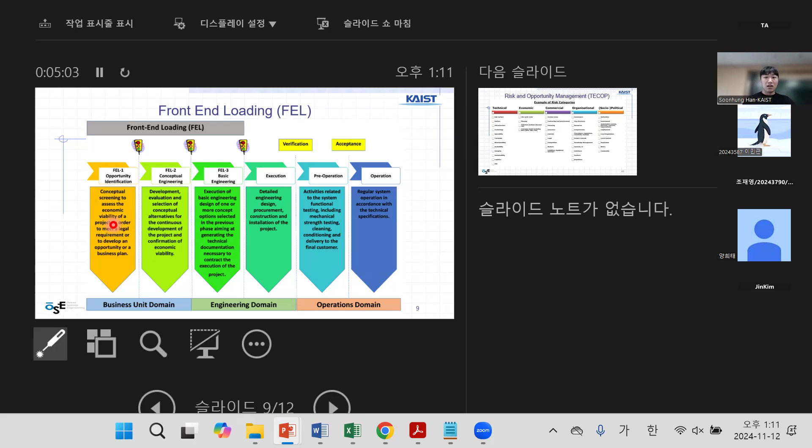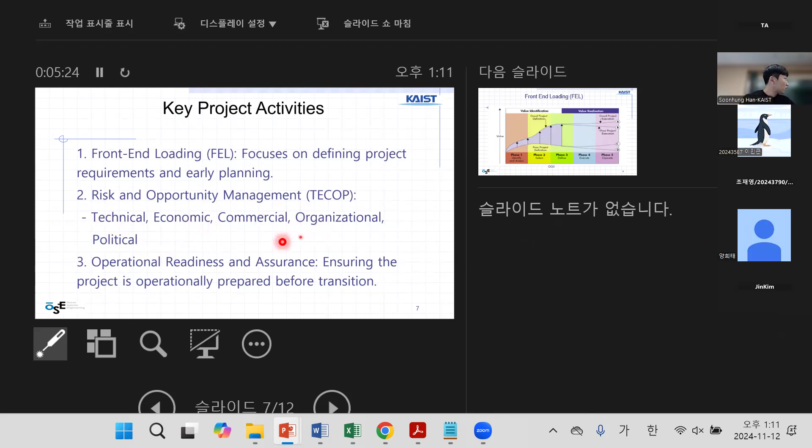And then I told you about risk and opportunity management, like this. TECOP is technical, economic and commercial, organizational, and political. So that is related to these issues.

So we have to identify some issues before we start the project. In the Ocean Plant project, the...

I think the technical design is more important than economic or commercial, because, as you saw in the video, the complicated design is in Ocean Plant.

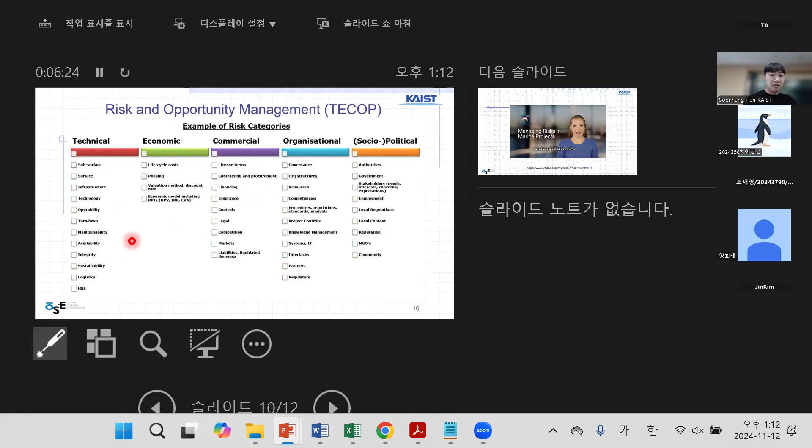So I will show you how to manage this effect, in the video.

Managing risks in marine projects is crucial for success. One key risk is environmental impact. For instance, during a dredging operation, we must assess sediment displacement and its effects on local ecosystems. Implementing a robust environmental management plan can mitigate these risks effectively.

Another significant risk is equipment failure. In a recent offshore wind farm project, we faced unexpected downtime due to a crane malfunction. By conducting thorough pre-project inspections and regular maintenance, we can minimize such disruptions.

Weather conditions also pose a challenge. During a marine construction project, we had to halt operations due to severe storms. Developing a flexible project schedule that accounts for weather variability can help us navigate these uncertainties.

Lastly, stakeholder engagement is vital. In one project, miscommunication with local fishing communities led to conflicts. By fostering transparent communication and involving stakeholders early, we can build trust and reduce resistance. Incorporating these strategies not only enhances project resilience, but also promotes sustainable practices in marine project management.

Right? Not a simple subject. This is the second part of it. So here, you can see I already explained about EPC.

What is EPC? Say again, what is EPC? Short name? EPC? Engineering procurement. Engineering, procurement, construction. So engineering means, in general, it's a design, more than design.

So EPC, the FEED is before EPC. So we already saw that EPC contract. Last week we heard about EPC contract.

Who will be the contract body? In the old days, 10 or 20 years ago, engineering companies such as Technip were the main contractor. But as the project gets bigger, like $1 billion, they gave up being the main contractor.

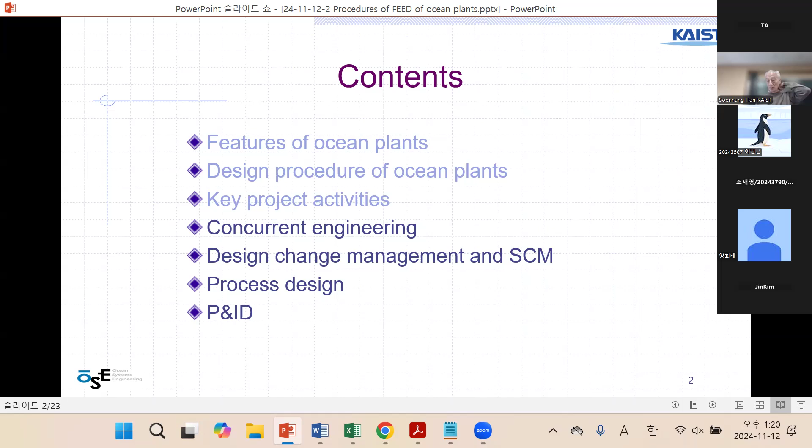You see more of this, and the motivation, because the ocean plant is complex, interdependent parts of millions of parts. Millions of them are interdependent, and also the whole system is independent.

You can say it's a closed system, very similar to, say, an airplane. Airplane is also a closed system.

More closed system is a spacecraft, a space shuttle, that is more closed. I mean the external boundary interaction is less, more or less, comparing to this building, you cannot say it's closed.

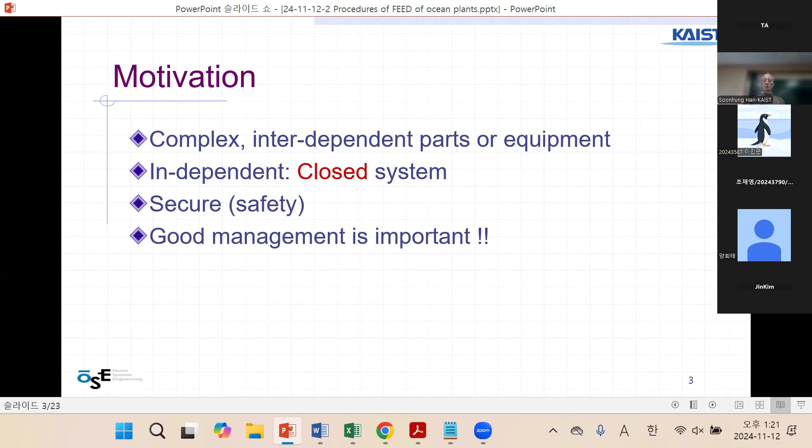And security or safety, and also that's why we need to have a good management.

So there was a big disaster 14 years ago around the Gulf of Mexico. There has been a big explosion and fire, and people were lost. There has also been a film about it. Have you seen this film? Only one? Okay.

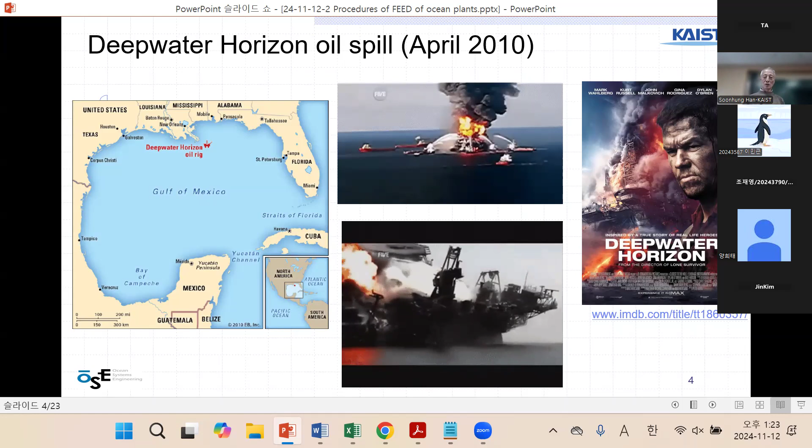It is a British Petroleum company, the owner of this project, BP, British Petroleum. They paid about 10 billion dollars. That money was lost. So after that, we needed to upgrade the safety regulation level.

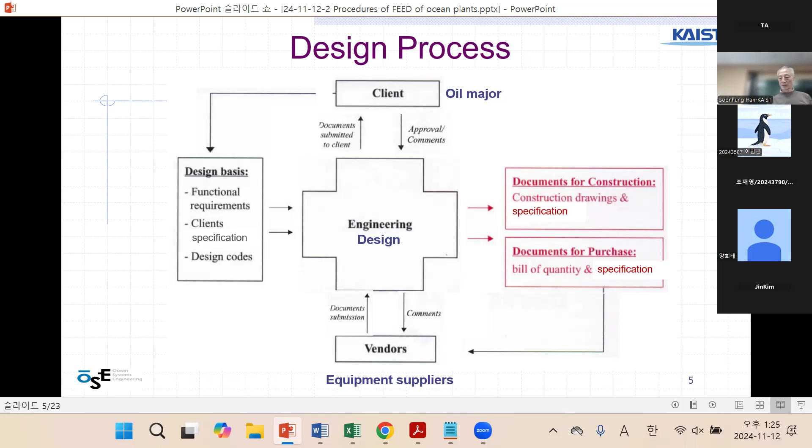Questions? This is a similar picture but from a different viewpoint. The client is here, engineering is here, and the design basis comes from process design, chemical process design. We call this PDP, or process design package, coming from chemical operations.

And then deliverables for vendors are put here. The vendor is also there for the design, needing contact with the vendors to know what is the size of the engine, what can be the weight of the boiler. So you need some information from vendors for the designing.

But actual purchasing comes through construction and procurement. So this is the EPC contractors' quotation and inquiries, and then there should also be another contract for purchasing: cost inquiry, bill of material, specification. The client comes in again with the design basis for EPC. Tendering is a contract, a call for contract, call for proposal, and material requisitions for LLI, long lead item.

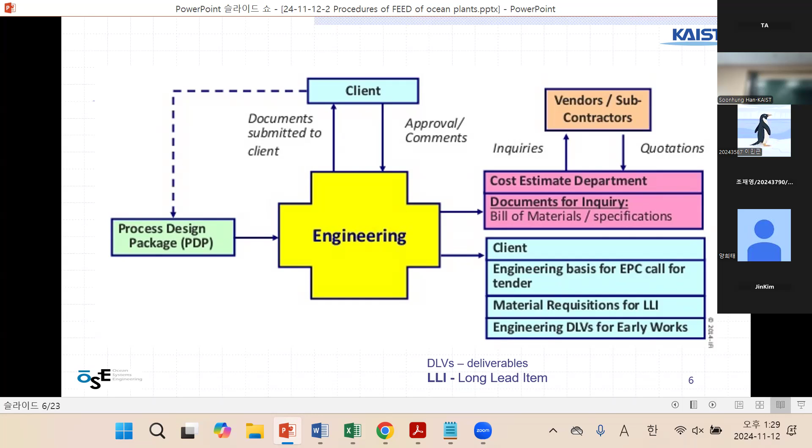And deliverables, right, concurrent engineering, so EPC. Traditionally it should be a sequential process: we do designing, we do purchasing, we do assembly, right? That is a natural thing. But with concurrent engineering, they want to make a shorter period so that the works overlap each other.

Then it means something like this: the drawing is produced at the end of the design stage, but procurement started before the drawing arrived. It's okay, sometimes some drawings are delivered in the middle, but the problem is purchasing already started while the drawing changes sometimes in between because of other disturbances. So change management becomes a very complicated situation in this way - it's important here, but this situation is more important.

The market is requiring less and less time to deliver new products. China and Samsung compete in the market, and Japanese companies produce new models faster—say, a new smartphone every month. But if Samsung takes 6 months or 3 months, that's not good. That's why you need speed and time to market, and that's why we need concurrent engineering. So the market is driving this requirement.

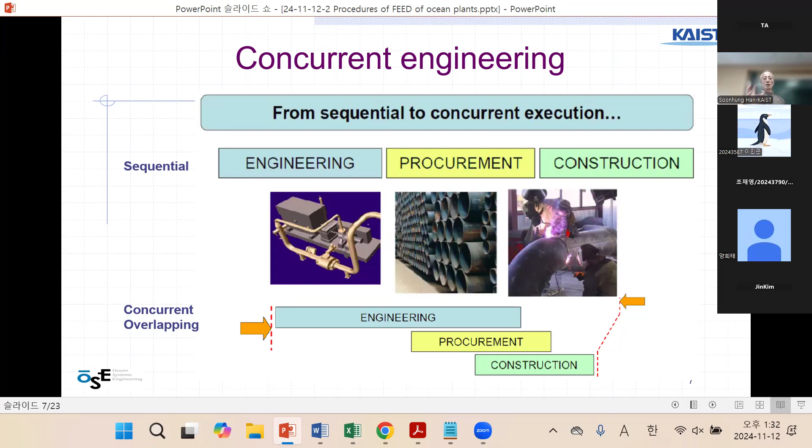But the problem comes to the engineering office or construction office. Any changes become complicated work, so you need to know how to handle this situation.

So again, in sequential engineering, design and bill of material—millions of pieces of parts and components, this is what we call the bill of material—then purchasing and assembly follow after.

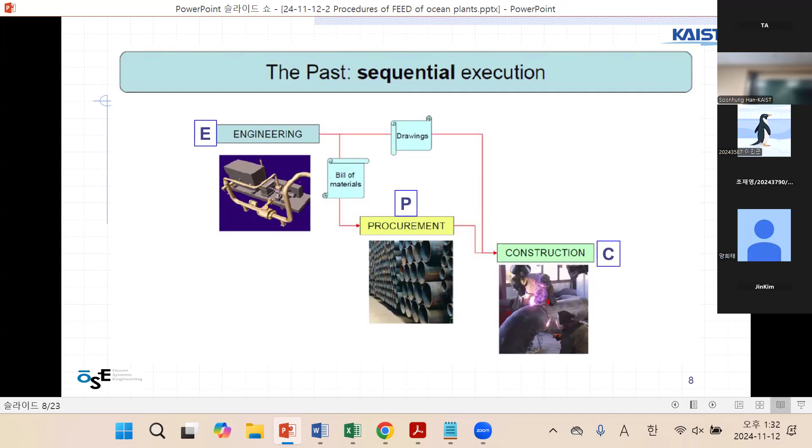But now in concurrent engineering, the bill of material is divided into several pieces so that they start before engineering is finished. Construction is also started before engineering or purchasing is finished. It should be overlapping.

So complication comes in. Design input early to avoid changes—if there is a change, there is rework. Say construction has started, but something happens to change the design: the engine is changed, or the boiler is changed, or voltage is upgraded, or something different. Then they have to change the procurement, purchase different items again, and construction needs to rework.

So integration is important—data consistency—because there is a change, but people don't know about the change. And it keeps going, so consistency, configuration management, and change management become essential.

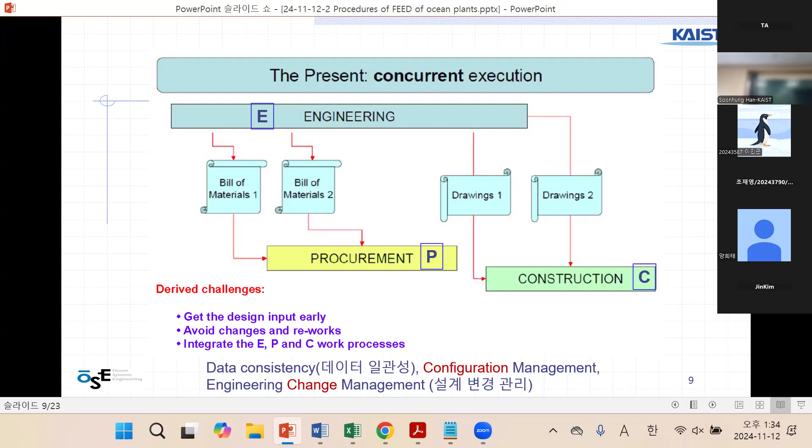So the process is a chemical process simulation from chemical engineers, based on which comes the P&ID diagram, the process diagram. Based on this process diagram or calculation simulation, you can list the equipment you need to purchase—the size of the boiler, condenser, gasification unit is fixed. Then you contact vendors to purchase this equipment. The vendor itself also has a design office, and they produce drawings, then manufacture the equipment and deliver it to the shipbuilding or EPC contractor. But you need installation of the equipment inside the ship, so you need a foundation. Engineering is the integrator of the plant equipment and is highly dependent on vendor data.

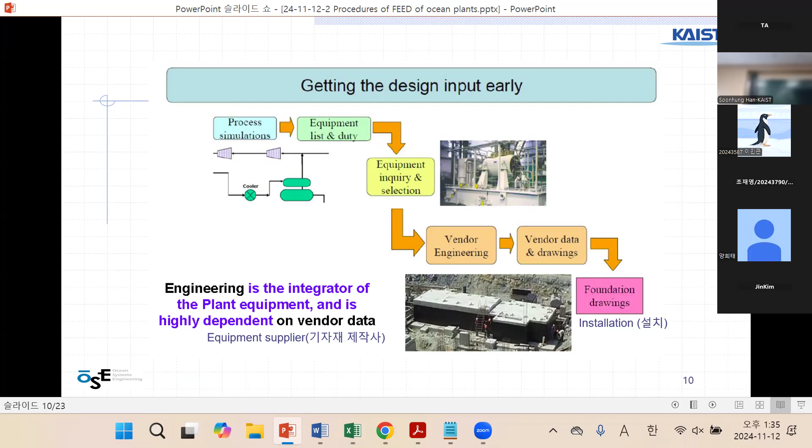Something happens when vendor data is late and they find something is wrong—number, size, or estimation. Estimation means not exact calculation, but assumption. Something happens that requires rework, found out at a late stage—there was some kind of overlapping or conflict, and then you need to make a change. This looks simple, but it's very hard to do, because at the design stage there's not enough information available, so you need good coordination between disciplines, and anticipation.

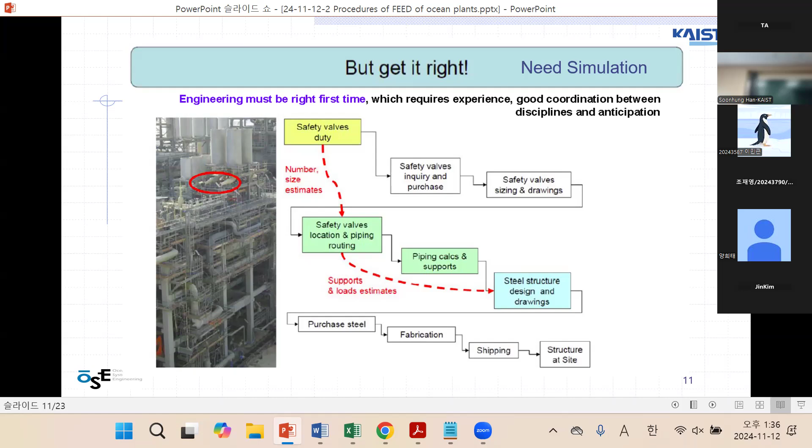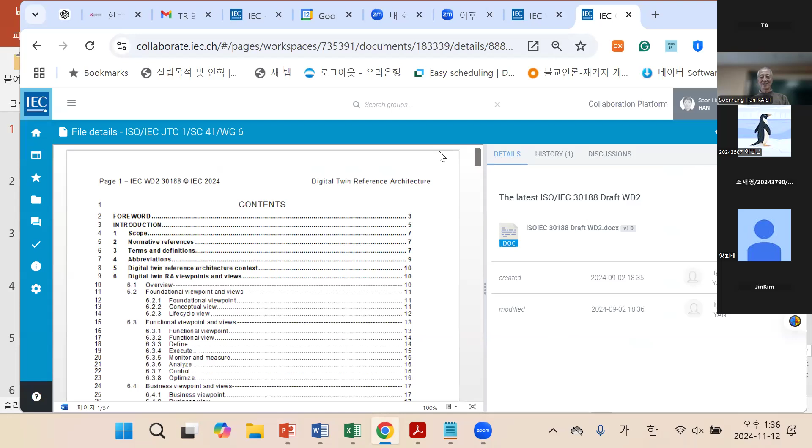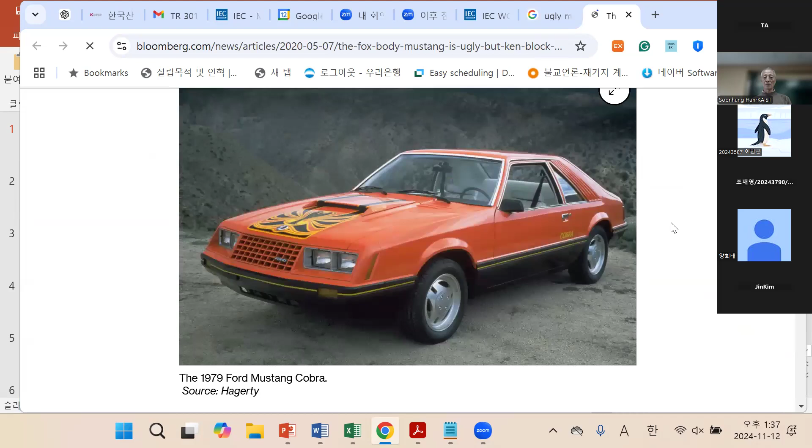They found that the engine was too big to accommodate inside the bonnet at a later stage. That's why they changed the shape of the bonnet in the middle, because the engine size was too big. So coordination between the engine department and the space design department was a problem. This happens in many cases across the whole industry.

So sources of change: technical issues, or reviews by clients. When I built my home, my wife changed her mind about the kitchen equipment and also the toilet—they changed the brand in the middle of work, which takes time. So this comes from client reviews too. Clients can also return, and third parties—vendors who make equipment—are another source. So it can be avoidable or unavoidable resistance.

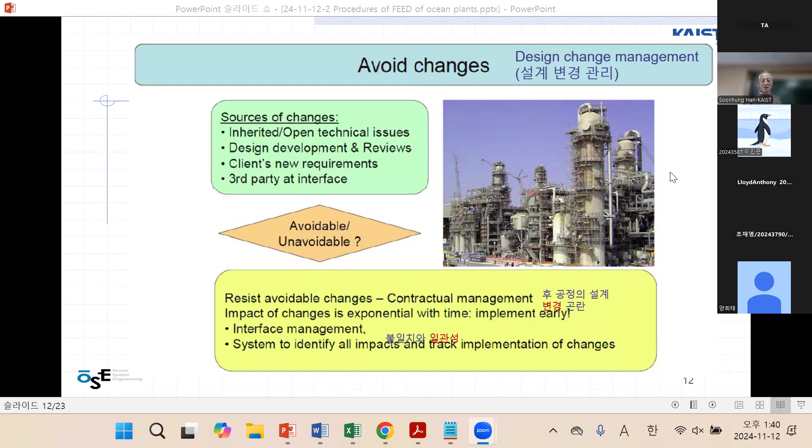For suppliers, because the supply chain is more and more important—in old days, companies usually made their parts inside the factory. 100 years ago, Ford Motors had about 100,000 people working in a single factory, and most parts, including the steel plate and tire, were made on site. Nowadays, most parts are outsourced, so the supply chain is more and more important. The problem is you need to control people outside the factory—mostly scheduling, controlling your suppliers, subcontractors, and vendors. Compared to 100 years ago, there is a lot more outsourcing now, so you need more contracts.

Inspection, supplier work, and test type, and quality, delivery, and quality is also very important. If one piece of a million parts has a quality problem, then the whole system can have a problem. So quality control is also complicated.

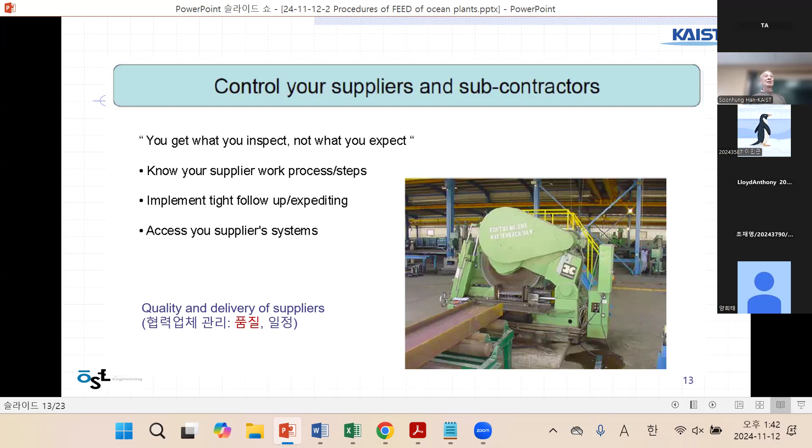100 years ago, quality control was also important. But the quality control is between companies, right? And more is coming from outside. So management of quality control is also important, and also scheduling together.

Project organization and project management, PM, engineering manager, design office, procurement manager, and construction site manager, okay? And also scheduling manager. The project control manager has cost control.

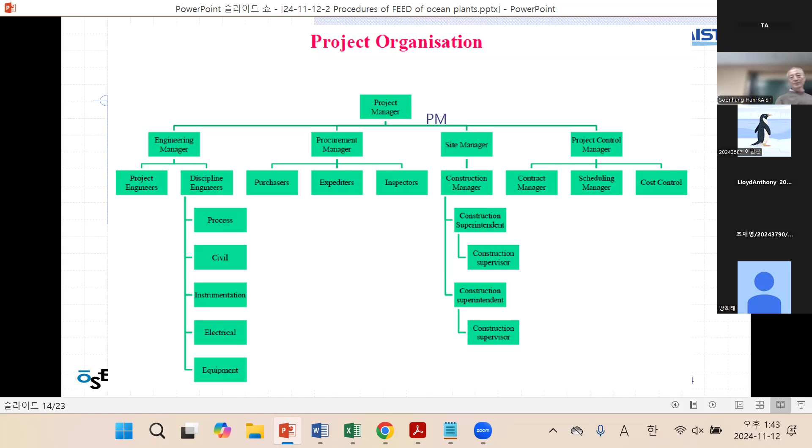Process design also comes from chemical engineering, right? Process building, they always have many short names: process flow diagram, material balance. Say we have air conditioning, you need a heat balance between cooling and there's a heat pump outside, right? So heat balance calculation. Something like this is material balance.

And then, which equipment should be purchased to make this air conditioning? You have a compressor, piping, fans, and electricity, motors, right? As the equipment data.

And then, so P&ID is a diagram, right? And then operation, how can we operate this chemical process? More detail.

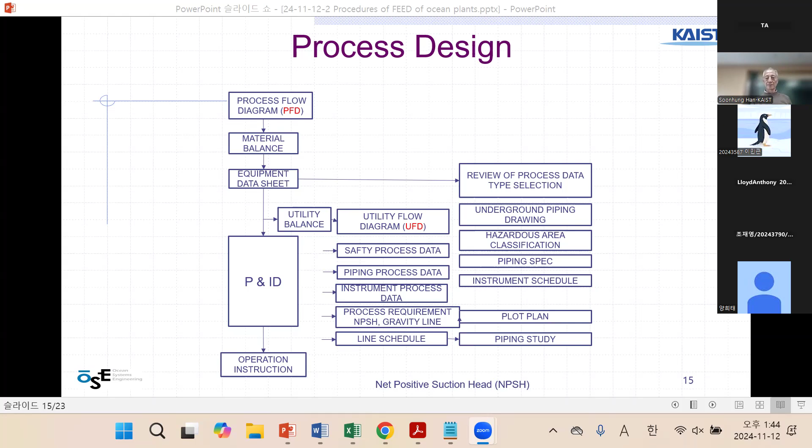Offshore structure, water plant, and process only for chemical process - more details on the chemical process. Design basis or design criteria or requirements coming from the oil major, Shell, and design factor - P&ID is the output.

Before that, there is also other calculation or data sheets: process equipment, process instruments, utility equipment, utility instrument. So before that, there is a process flow diagram or utility flow diagram.

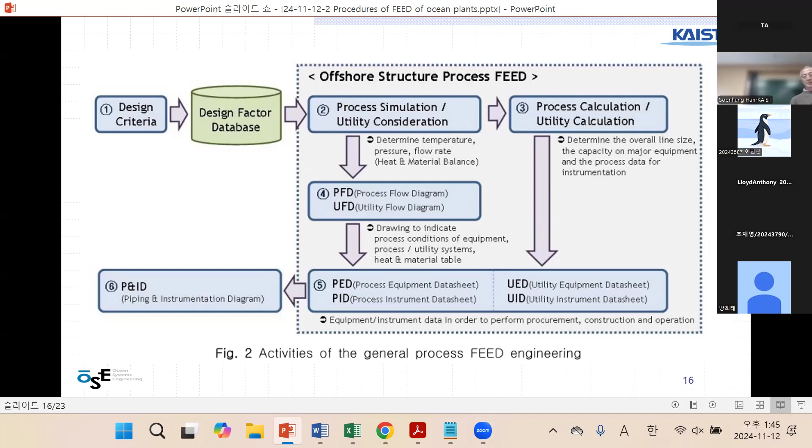Many short names - this is a sample of P&ID, piping and instrumentation diagram. But this is a simpler diagram. Simpler means there is no size, right? This is only showing the items and connections.

Connectivity - so between, say, a membrane module or pump and valve, this is a valve, and a buffer solution tank, something like the tank.

And then after that, you need to make a real drawing for the construction or installation. This is just for the conceptual stage.

Then coming from this P&ID, you can make a list of purchases, list of equipment, and also pipes, right? But pipe needs a more detailed diagram or drawing to calculate the length is X. This is only for equipment and tank and such.

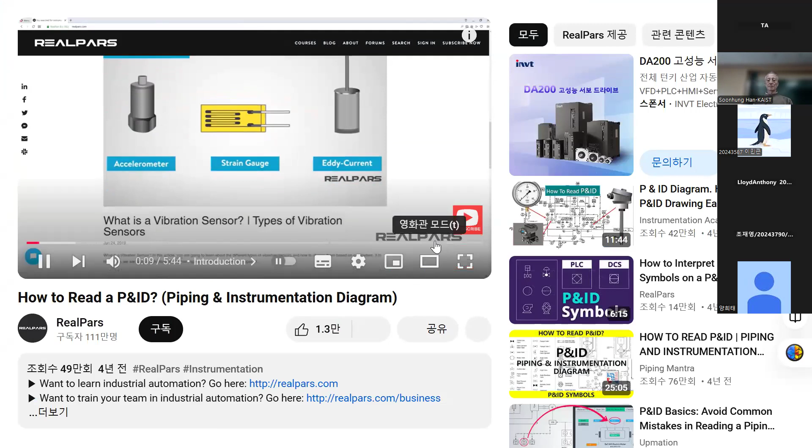In many of our RealPars videos, we discuss control systems and instrumentation devices in great detail, so you can understand exactly how they work. In this video, we will learn how to read a P&ID, which is something that engineers encounter on a daily basis.

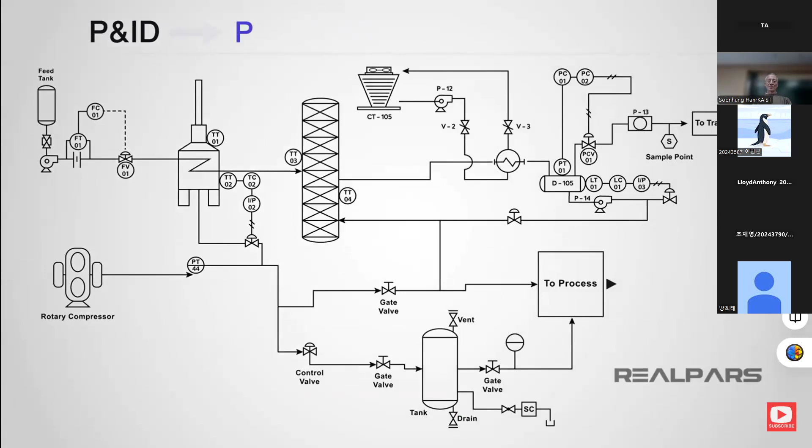P&IDs, or piping and instrumentation diagrams to give them their full name, are schematic representations of pipelines, equipment, instrumentation, and control systems found in process environments such as oil refineries, chemical plants, paper mills, and cement plants, etc.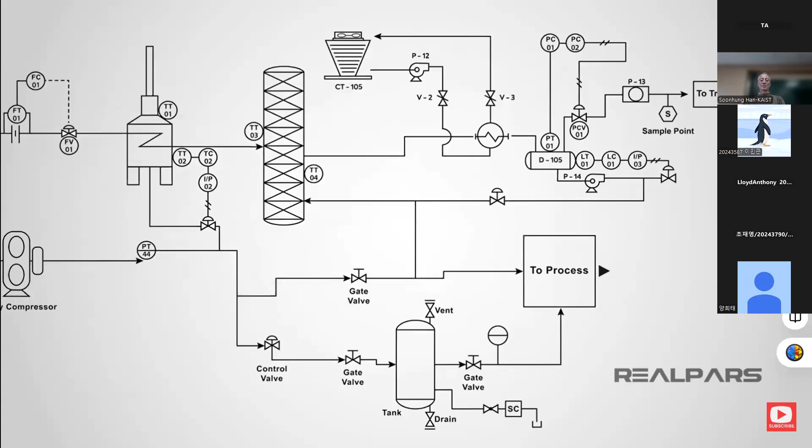The symbols contained in P&IDs represent the equipment in the process, such as actuators, sensors, and controllers. Process equipment such as valves, instruments, and pipelines are identified by codes and symbols. As well as devices and pipelines, a P&ID will commonly contain information on vents, drains, and sampling lines, as well as flow directions, control I/O, and interconnection references.

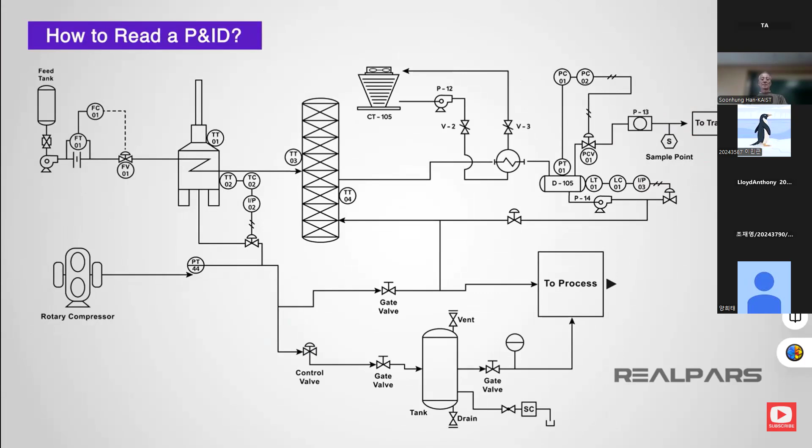The instrumentation codes listed in P&IDs follow a standard format. After some practice in reading P&IDs, you'll know these codes by heart. But in the meantime, there are many resources on the web where you can download these tables for reference.

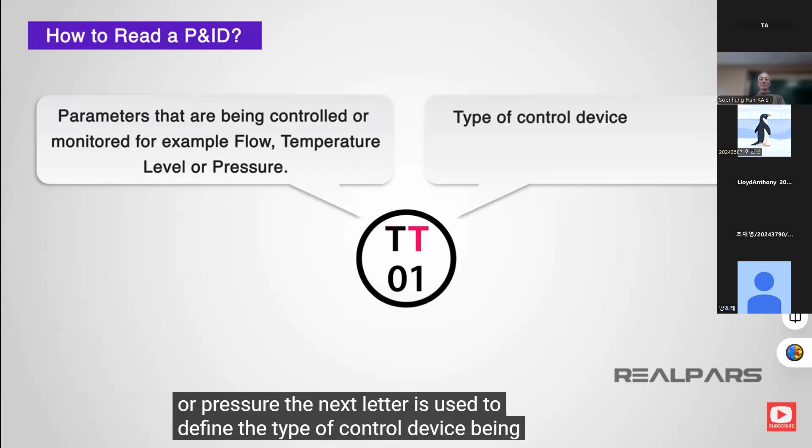The first letter of the code identifies the parameter being controlled or monitored, for example flow, temperature, level, or pressure. The next letter defines the type of control device being used, for example transmitter, valve, or controller.

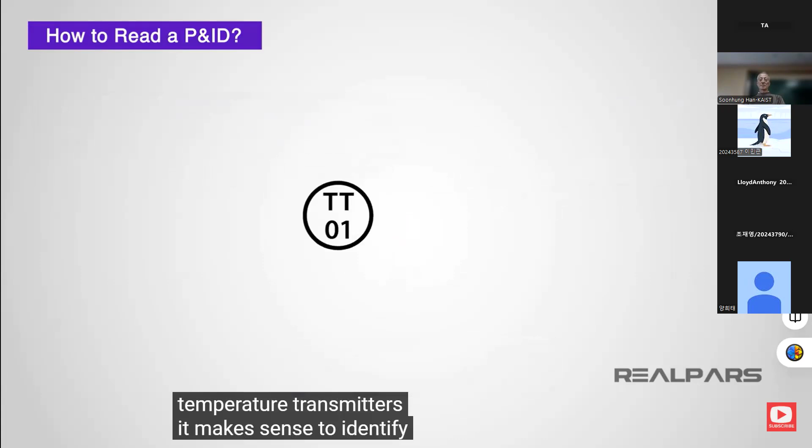The number refers to the logical enumerator. For example, we may have a system with 4 temperature transmitters. It makes sense to identify these as TT01, TT02, TT03, and TT04.

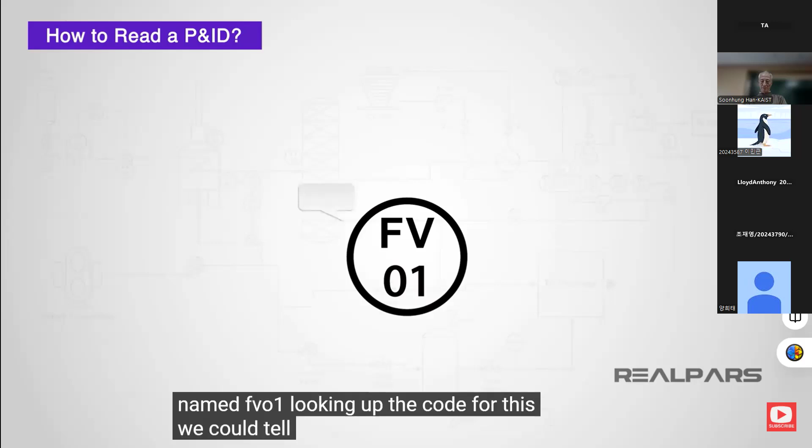Let's consider for a moment an instrument on a P&ID named FV01. Looking up the code for this, we could tell this is a flow valve numbered 01.

Symbols, circles, and lines are used to represent instruments and to show how they are connected to the rest of the system.

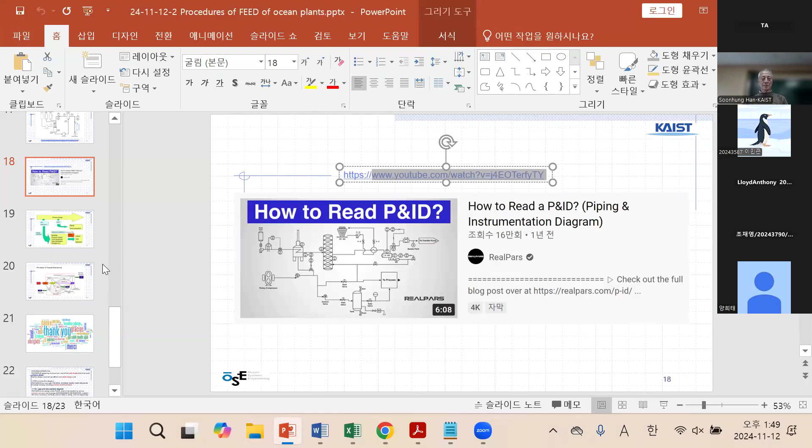Process design - the chemical process design produces PFD, and the full name, P&ID. Based on the P&ID, we need piping and instrumentation, PFD, and heat and material balance, process data sheets, something like an Excel file. Then you can get equipment specification and purchase, which means contacting vendors, and they provide the drawings so we can continue.

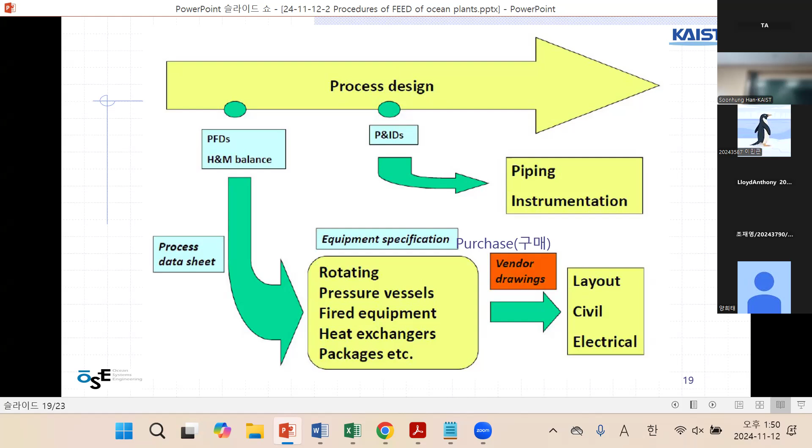This is another slide on topside engineering. Topside means the top part of the ocean plant. An ocean plant is made of the floating body, substructure, and topside, which is some kind of plant similar to a land-based plant. For example, a floating nuclear power plant has the nuclear power plant as the topside of a floating body. Similarly, an aircraft carrier is a floating body with an airbase, and a cruise ship is a floating body with a hotel. So topside for our case is a chemical plant, usually an oil and gas treatment plant or refinery. The design basis is chemical process simulation, PFD, UFD, and P&ID. Most of them come down to P&ID, and electricity is coming somehow, including P&ID too.

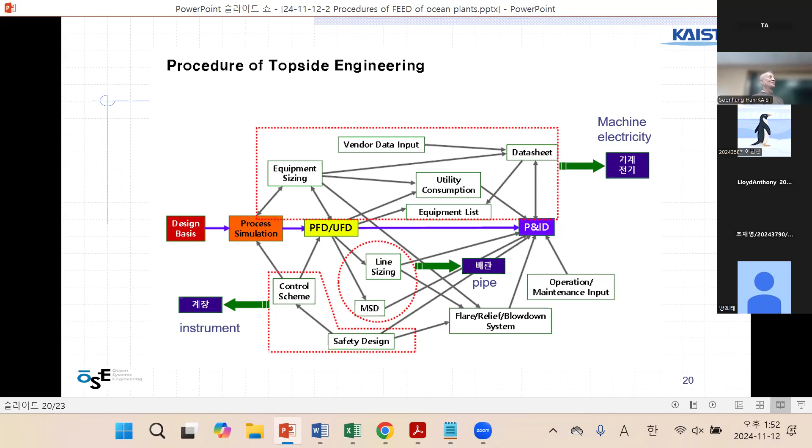Okay, question? Enjoy the discussion session.

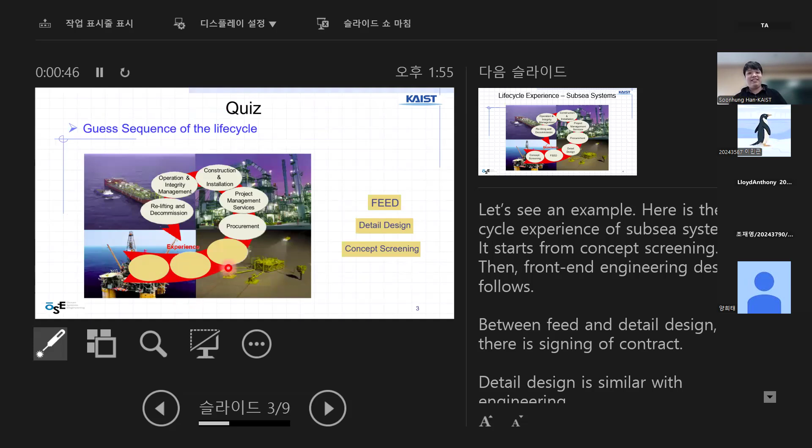This is for the first one, and then the second one. The third one is detailed design decision. This is the answer.

Concept screening is the initial stage of brainstorming, for the project's feasibility and primary goals and requirements. FEED is front-end engineering design, covering the detailed requirements before full-scale design, and it's for developing the initial design. Lastly, detailed design is completing precise drawings and technical specifications.

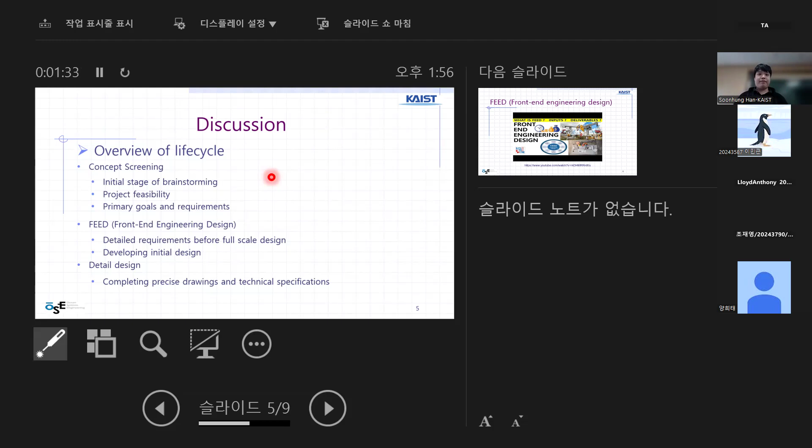Next, let's see what front end engineering design is.

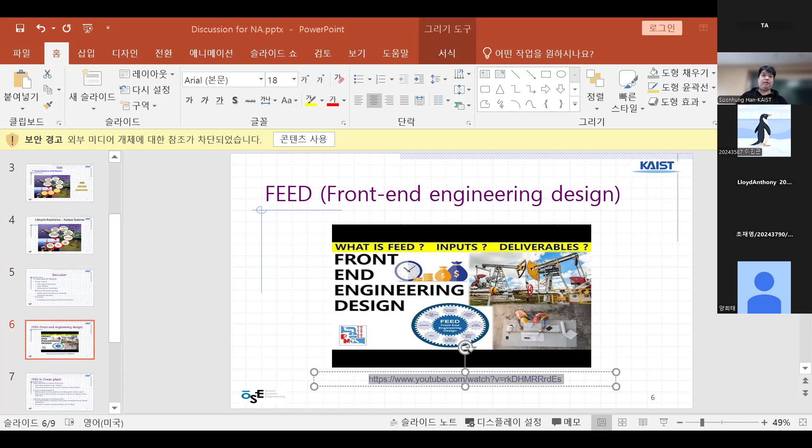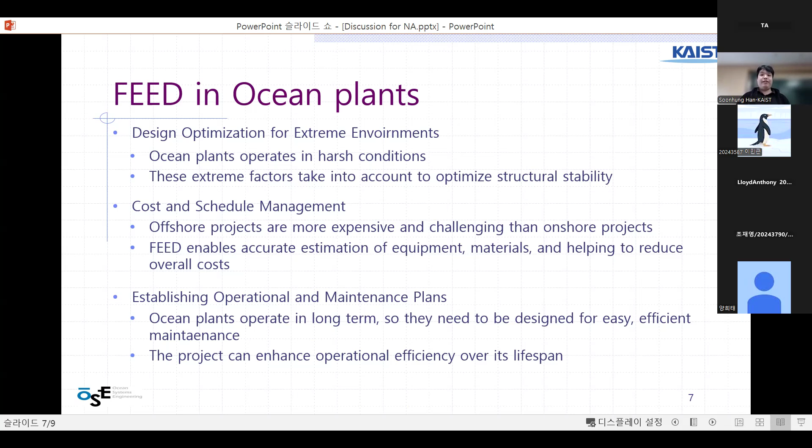Also, establishing operational and maintenance plans so that the project enhances operational efficiency over its lifespan. Also, environmental and regulatory compliance - the environment is highly sensitive, so impact must be minimized. This includes environmental impact assessment and development of environmental protection plans. Also, safety assurance is a top priority in design for both human and environment, through thorough safety analysis, incorporating emergency preparedness into design.

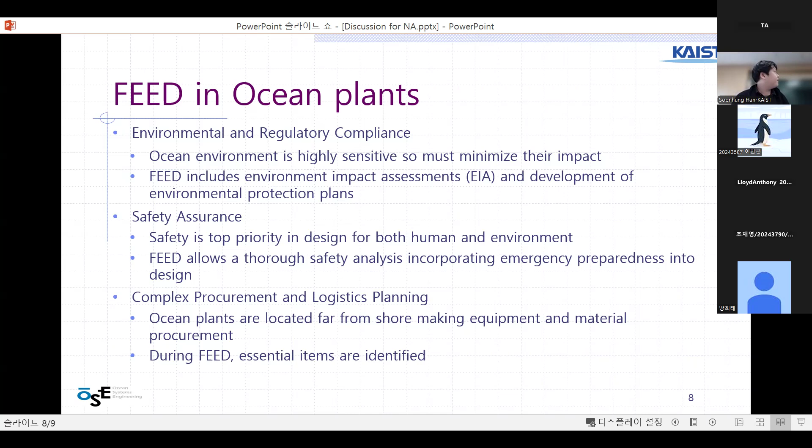Lastly, I think complex procurement and logistics planning is also important. Ocean plants are located far from shore, making equipment and material procurement essential items that must be identified. And this is all for my discussion.